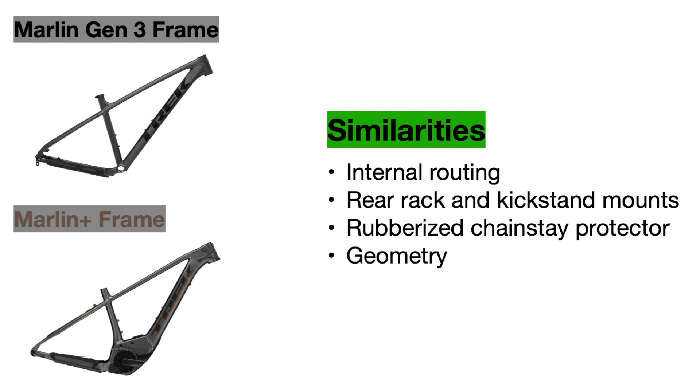For the differences, we have some pretty significant ones. So for one, of course, the Marlin Plus frame has to accommodate the battery and the motor. So we do have some redesigned sections to integrate the battery in the down tube, as well as add the mid-drive motor near the bottom bracket. The battery is a 400 watt-hour Bosch branded compact tube battery, which is not removable, but that makes it thinner and sleeker.

And the motor is a 50 Newton meter Bosch Active Line Plus motor, which is a smaller motor than many e-bikes out there, but that also makes it more lightweight and a lot quieter as well. And one cool detail here is that you have the Marlin logo on the side, so there's some more proof that this is in fact a Marlin.

This battery and motor combination lets you go up to 25 kilometers per hour or about 15 miles per hour, so these bikes are designed for more light trail riding and not going too fast or crazy with them. They have a riding range of 2 to 4 hours, but you can extend this range by about 60% by adding a separate 250 watt-hour Bosch range extender on the down tube.

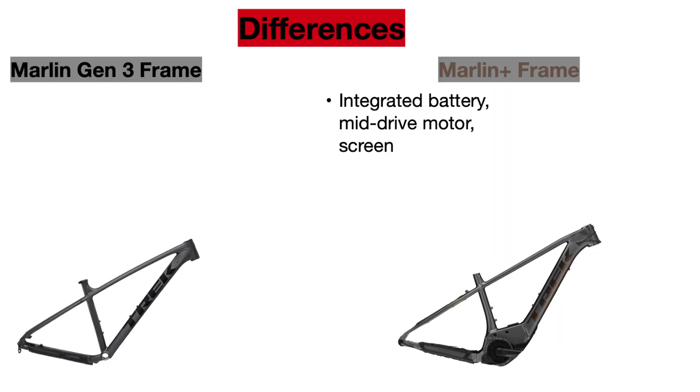These electric Marlins also come with a full color display screen on the left side of the handlebar, and this is the Bosch Purion 200 screen that is pretty simple and intuitive to use, so that's nice. However, that's not all. The Marlin Plus frame also has mounting points for a mudguard in the back and comes with the SRAM universal derailleur hanger that allows for ease of replacement if you damage this part.

But the coolest stuff is here. The normal Marlin uses Alpha Silver aluminum for construction, which is Trek's lowest end aluminum, but the Marlin Plus upgrades this to Trek's Alpha Platinum aluminum, which is their highest end aluminum, so it is stronger, lighter, and has smoother welds. The normal Marlin also has a straight head tube, which is weaker for mountain biking and restricts you to lower end suspension forks, while the Marlin Plus upgrades to a tapered head tube for a stronger front end that allows you to upgrade to more durable suspension forks.

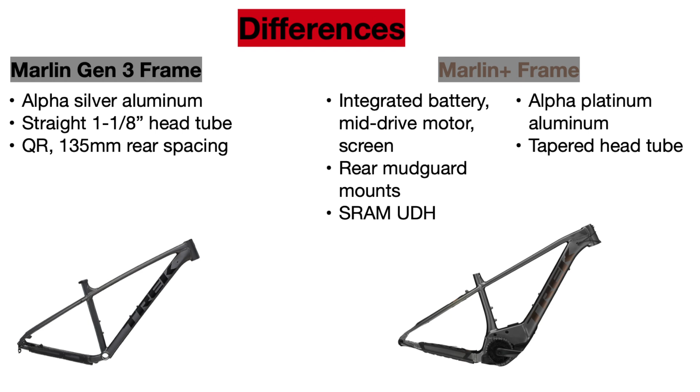And finally, the normal Marlin has 135mm spacing in the rear of the frame for the normal quick release axle size, while the Marlin Plus upgrades to boost 148mm wide spacing and a through axle for way more strength and durability on the trail.

If only we saw these upgrades come to a normal Marlin, but for now it's nice to see them on the Marlin Plus. Okay, but now onto those geometry measurements. I made this table here to highlight some of the main numbers, and as you can see, Trek tried to make these frames pretty similar, so the electric version would handle like the normal Marlin. So we have a decently slack head tube angle, so the bikes are pretty confident while riding downhill on trails, and a steep enough seat tube angle so the bikes can climb uphill without too much effort.

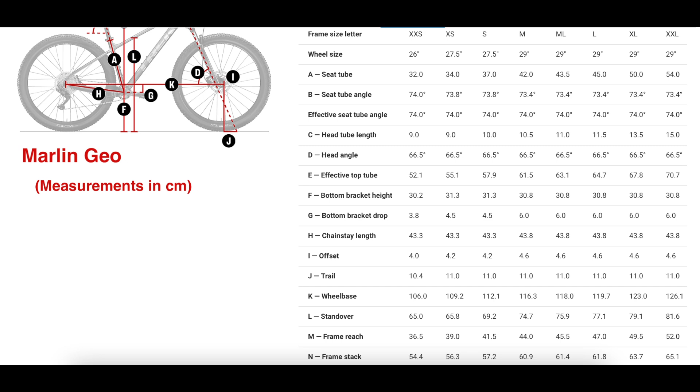I'll put up the full geometry measurements on the screen right now for both bikes, if you do want to pause and take a look at any of these. And although there are some changes, the bikes should be fairly similar in how they ride, besides of course the added weight of the e-bike.

Alright, now let's get into the specifics on each bike, starting with the differences between the Marlin 6 and the Marlin Plus 6. Now in my comparison, I'm only going to cover the differences, so if I don't talk about a specific component on these bikes like the handlebars or the seats for example, it means that those parts are identical between the normal Marlin and the electric version of the bike.

Alright, so the first difference we got to talk about here is the price. The 2023 Trek Marlin 6 Gen 3 currently retails for $900 US, while the Marlin Plus 6 retails for 2,500 British pounds, which equates to about 3,100 US. Definitely a huge price jump, but let's show you what changes for that money, starting with the color differences.

So the Marlin 6 Gen 3 is offered in 4 colors, which are matte olive gray, hex blue to a deep dark blue fade, matte Dnister black, and blue sage. The Marlin Plus 6 is only offered in 2 colors, which are crimson and Dnister black. For the next difference, we have the suspension forks.

The Marlin 6 comes with an SR Suntour XCT30 fork that uses a coil spring, has 30mm wide upper stanchions, has a lockout so you can make the fork fully rigid for efficiency in flat areas. It uses a quick release axle and has 100mm of travel in all frame sizes.

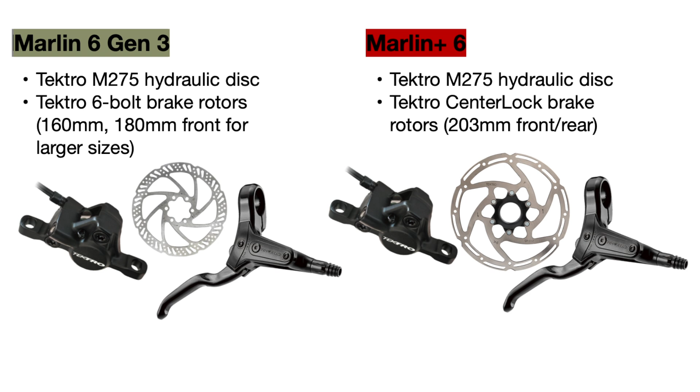Both bikes actually use the same Tektro hydraulic disc brakes, which are nothing special, but they get the job done. The difference is in the brake rotors, which are smaller 6-bolt rotors on the Marlin 6, but wider 203mm rotors on the Marlin Plus, which gives you much better stopping power. These are also center locking, which makes them easier to install and remove, and also means that they are less prone to warping. And finally, we have the last component difference between these bikes, which is the drivetrain.

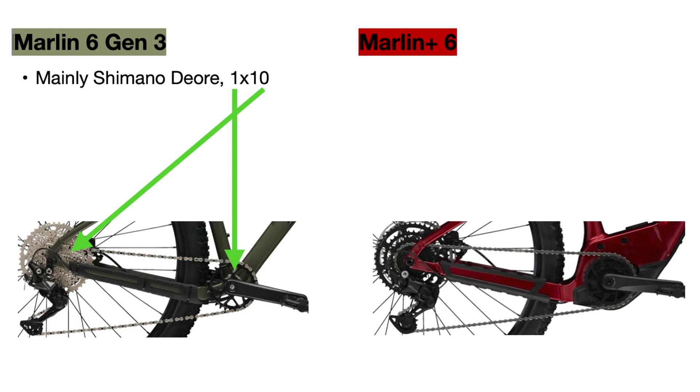So the Marlin 6 uses a mainly Shimano Deore 1x10 drivetrain that has 1 gear in the front and 10 in the rear for a total of 10 speeds. This drivetrain is super reliable and durable, so it's a good one to have on this bike. The Marlin Plus 6 then uses the new Shimano CUES drivetrain, which has 9 speeds and isn't as high quality or as expensive as the Deore, but it should be good on this e-bike.

For some more specifics, the Marlin 6 uses the Shimano Deore shifter that lets you shift up to 3 gears at once when going to an easier gear for pedaling, while the Marlin Plus 6 uses the Shimano Cues shifter that allows you to shift up to 2 gears at a time when going to an easier gear, so not that different, but the Deore is more durable and more reliable.

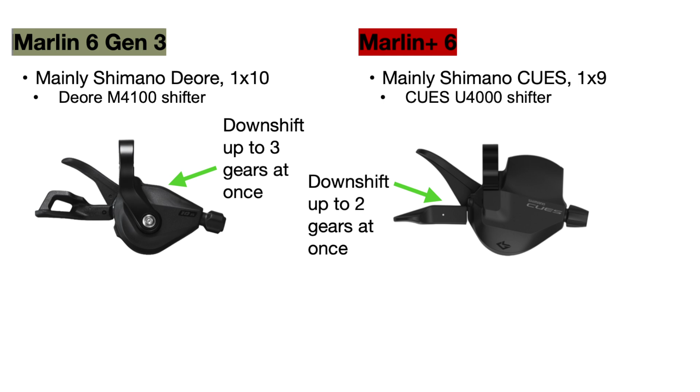The cranksets are both different brands, but the main thing here is that the electric Marlin uses a 32-tooth crankset over a 30-tooth, which allows the Marlin Plus to have harder gears for going faster, which also in turn means that the Marlin 6 has easier gears for riding uphill.

For the cassettes, both have a range from 11 teeth to 46 teeth on the cogs, but the Marlin 6 has a more incremental range since it has 10 speeds instead of 9. The Marlin Plus does use a LinkGlide cassette, which is new from Shimano, and it has thicker gears, taller teeth, and is 3 times more durable, so that'll help it last longer on this e-bike.

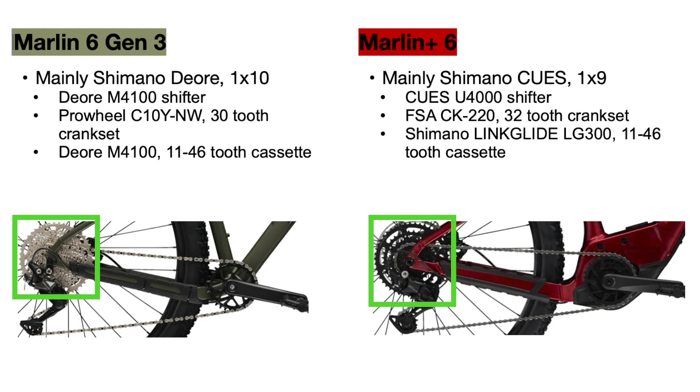And for the rear derailleurs, the Marlin 6 has a Deore derailleur that is super durable and has a clutch mechanism that lets you add more tension on the chain to prevent chain noise and damage. The Cues rear derailleur does not have a clutch, but it does use a higher tension spring to add some chain tension. However, overall it is made from lower quality materials that won't be as durable.

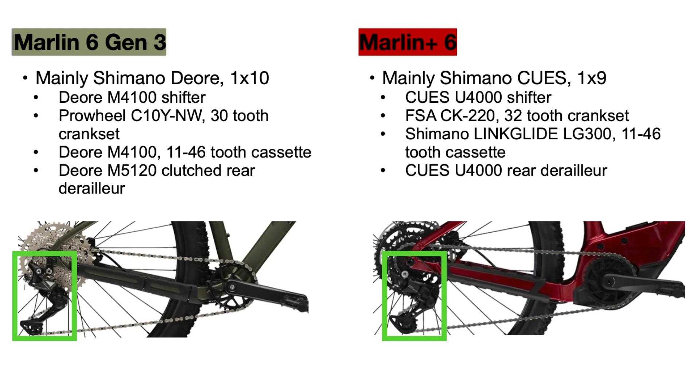And we have one last difference between the bikes, which is the weight. The Marlin 6 weighs about 32.63 pounds on average in a size medium, while the e-bike of course weighs more at 49.5 pounds, which isn't too bad for an e-bike.

Okay, so moving on to the Marlin Plus 8. The normal Marlin 8 currently costs $1,300, while the Marlin Plus 8 jumps up to 3,000 pounds, or about $3,700. For the colors, the Marlin 8 comes in 2 colors, which are matte Nebula black and the color crimson. The Marlin Plus 8 is instead offered in the colors Mercury, which is actually pretty similar to the Marlin 8 color, and a purple flip to black fade.

Next, for the suspension, the Marlin 8 uses a RockShox Judy Silver air fork with 30mm wide stanchions, a lockout, quick release axle, and 100mm of travel in most sizes. The Marlin Plus 8 upgrades to the RockShox Recon Silver RL air fork, which has wider 32mm stanchions for added strength, a motion control damper for better suspension efficiency, a lockout, tapered steerer, and boost 110 spacing for added strength, and 120mm of travel in most sizes.

It's interesting to see that Trek did not put a 34mm wide fork on this e-bike like they did with the Marlin Plus 6, but 32mm should be good enough, and that makes it a little lighter as well.

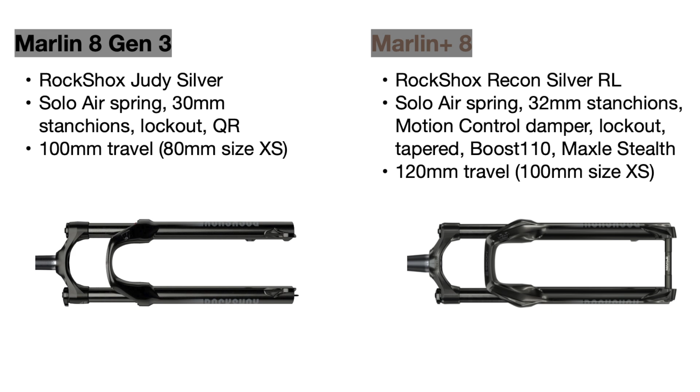Now for the wheels. Starting with the rims, we have Bontrager Covey tubeless ready rims on the Marlin 8 that we also saw on the Marlin 6, but the Marlin Plus 8 goes to the Bontrager Line TLR 30 rims, which are also tubeless ready. The Line 30 rims are wider for added strength, and Trek isn't specific on how many holes are in the rim, but there shouldn't be a huge difference in strength either way.

And the hubs once again are similar besides the sizing, though the Marlin Plus 8 does have a Shimano Microspline hub in the rear, so it is compatible with higher end Shimano drivetrains, so that's nice if you do want to upgrade your drivetrain in the future.

Now the tires on these bikes are different as well, with the Marlin 8 using the Maxxis Ardent tubeless ready 60 TPI tires that are 2.4 inches wide in all sizes, and you can see depending on the frame size of the bike we do have some different diameters like 26, 27.5, and 29 inches. And for the Marlin Plus, we have some brand new tires from Bontrager, and these are the Gunnison Pro XR tires that are also tubeless ready in 60 TPI, but they are wider at 2.6 inches wide for better stability.

The tread patterns are also different, with the Marlin 8 having a faster rolling yet aggressive pattern, and the Marlin Plus 8 having larger knobs for better traction. And one final important thing to mention here is that the Marlin Plus 8 is set up tubeless from the store, so you won't have any inner tubes on this bike, which means less chance of getting flats, no risk of getting pinch flats, and you can run lower tire pressures for better grip.

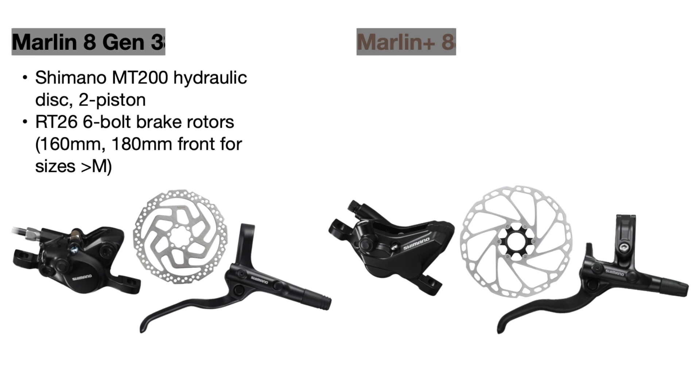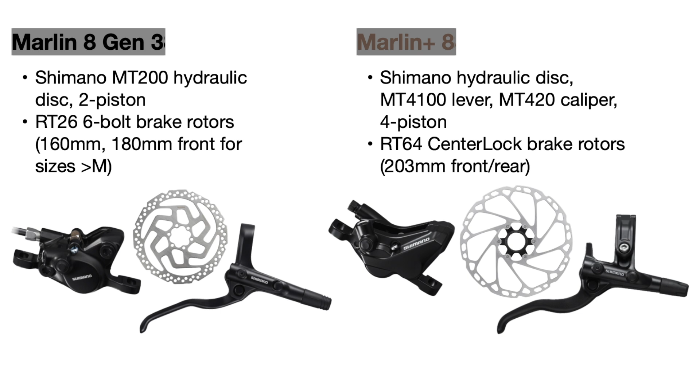And next, the brakes on these bikes are pretty different, with the Marlin 8 using Shimano MT200 hydraulic disc brakes that are 2-piston and use 160mm wide brake rotors in most sizes, but 180mm in the front for sizes medium and above for some better stopping power. The Marlin Plus 8 goes to the Shimano MT420 brakes that are 4-piston for way better stopping power, and they have much wider 203mm wide brake rotors in the front and rear, which are also center locking, so once again some better installation and some better resistance to warping.

And finally, for the drivetrains, I'll put both of them on the screen right now, and this one is a huge upgrade. So the normal Marlin 8 uses the SRAM SX Eagle 1x12 drivetrain that has 12 speeds, and this is the entry-level mountain biking drivetrain from SRAM. The Marlin Plus 8 upgrades to the Shimano Deore 1x12 drivetrain, which is definitely higher quality, more reliable, and more durable.

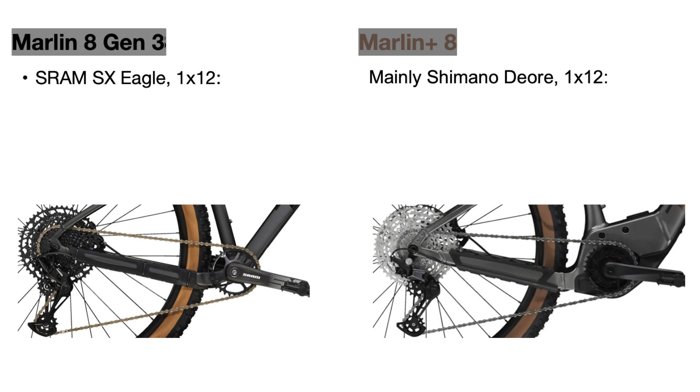To compare some of the drivetrain parts, the SX Eagle shifter allows you to shift up to 5 gears at a time when going to an easier gear for going uphill, while the Deore only lets you shift up to 3 gears at once, but the Deore shifter is definitely more durable and more well constructed, so it just shifts a lot smoother. And once again, we have 32 teeth on the e-bike crankset instead of 30 teeth on the normal bike's crank. So same story, you get harder gears on the e-bike and easier gears on the normal bike, but it's not a huge difference.

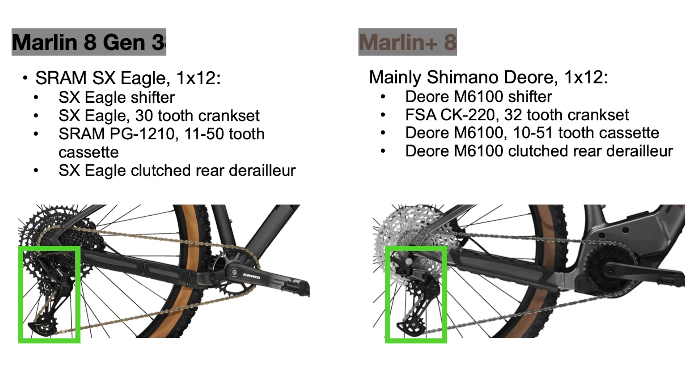The cassettes are pretty similar. The Marlin Plus just has a slightly wider range and has more durable and lightweight components. And the rear derailleurs both have clutches to add chain tension, but the SRAM SX derailleur is just much lower quality and tends to bend very easily, whereas the Shimano Deore is super well built and reliable.

But lastly, we have the weights of both bikes. The Marlin 8 in a size medium with inner tubes installed comes in at 31.51 pounds on average, while the Marlin Plus 8 in a size medium with tubeless sealant installed comes in at 46.96 pounds, so not bad there either. But that is it for my comparison on these new electric Marlin Plus models. I'll show you all of those completed tables on the screen now, but let's talk about these bikes and my thoughts on them. So I actually think these are pretty cool.

Obviously, we love Marlins here on my channel, so I'm interested to see all of your reactions to these electrified ones. I know e-bikes are definitely not everyone's cup of tea, but nonetheless, if you are looking to buy an e-bike, these would be the least expensive ones from Trek, so it allows more people to get on bikes. That being said, these bikes do not nearly have as much power as other e-bikes out there, which can seem like a bad thing if you're paying over $3,000 for an e-bike and it tops out around 15 miles per hour. Maybe when they come to the US, they'll have a higher top speed, but to some people, this could also be a benefit since you're not going to be going as fast on the trails and you still have to work a bit to ride the bike, making it more of a boost rather than a full-on electric bike.

In terms of components, I think these Marlin Plus bikes totally rocked it. We have tapered head tubes, boost spacing, amazing drivetrains, and not bad suspension forks. Of course, some of the parts could be better, like the rims on the Marlin Plus 6, for example, but overall, they aren't too bad. If I had to pick one of these bikes and I knew I wanted to keep an e-bike in my garage, I'd go for the Marlin Plus 8, since for about $600 more, you get a way better drivetrain, suspension fork, and tubeless wheels, and a dropper post on top of all that, so super good and crucial components to have a capable bike on trails that does not need to be upgraded.